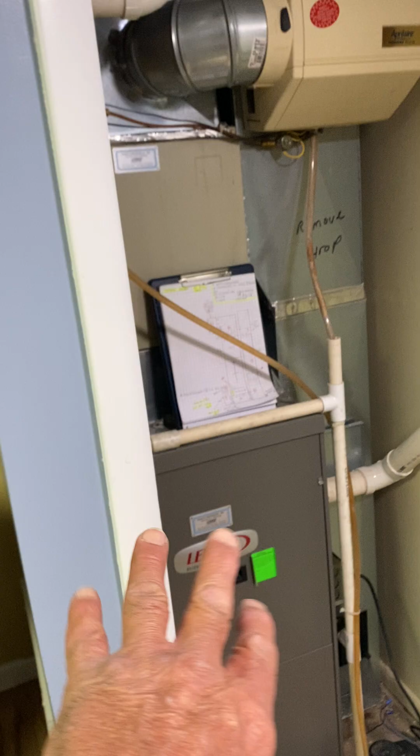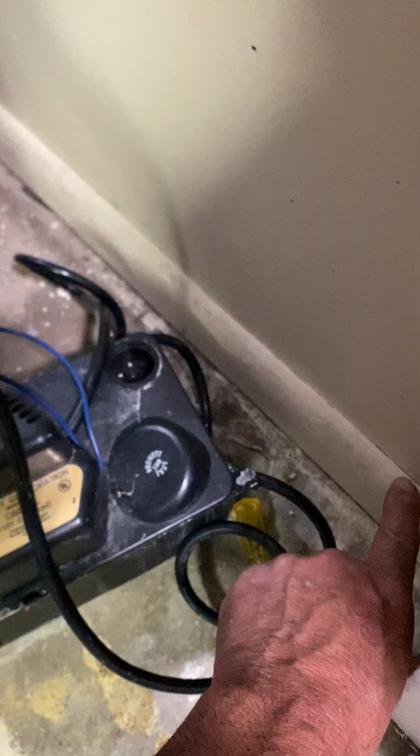So the new furnace will sit 2 inches from this 2x4 wall. I did that just so you can access the filter. So this trim, you have to remove this trim as needed.

So right here we have a filter grill. We're going to remove the filter out of this grill. And here I just made a 6x24 to, sorry, that's supposed to be, yeah, 6x22 to 2x22, 90.

It's gonna just go into the base here and just open it up to that wall. Obviously you're gonna have to seal it from the inside and stuff, but...

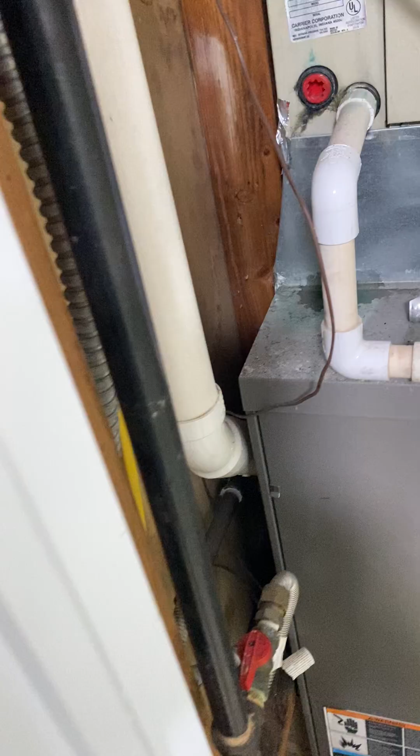We are moving the furnace back just a little bit, so the back of the furnace will sit 1 5/8 inch from the back wall. Right now it's 4 inches from the back wall, best I can tell. I did that just so this piece doesn't go backwards to that 90. Anyway, so I have a cut line right there.

So you're probably gonna have to, I'm making mine slip, so you're gonna have to bend those drives to slips and put your duct in. Then I come 2 inches past this wall with our next duct.

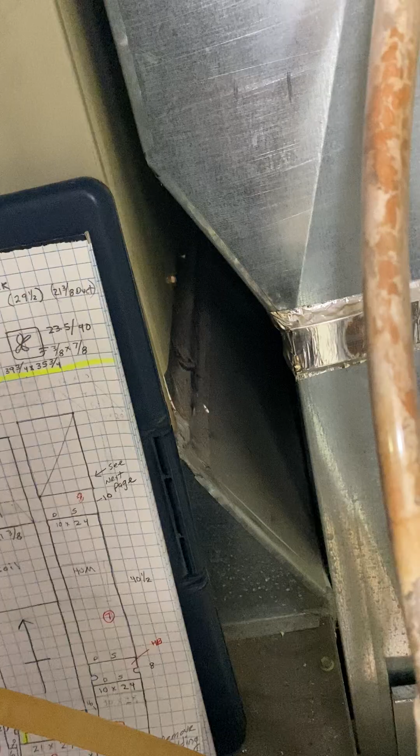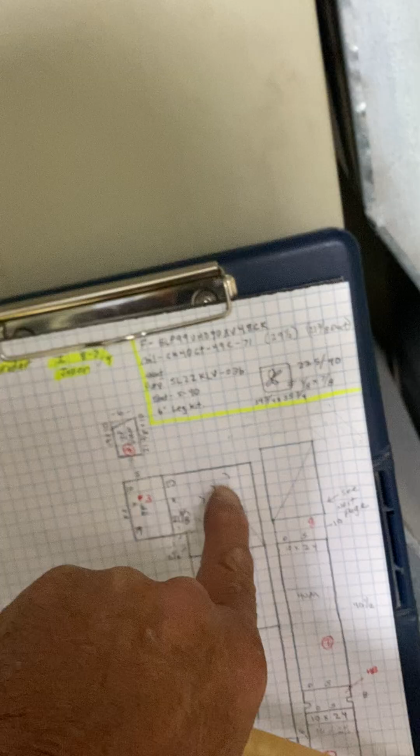But anyway, so your furnace will sit on a 90, 8-inch base, 90 filter box, and duct just as it shows. So I have a new 90 on it, and to do that, this can only be 10 inches wide.

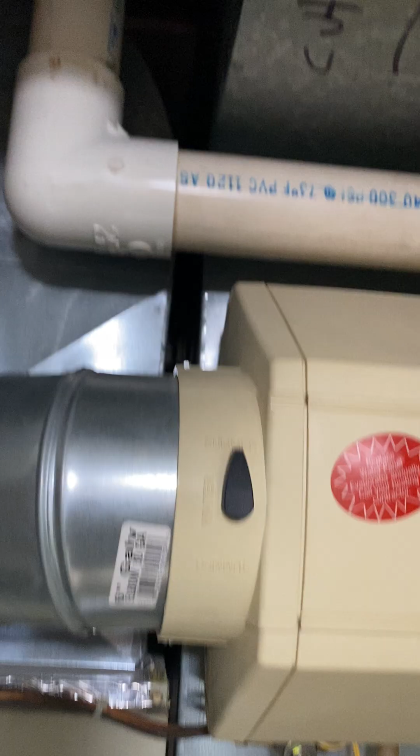I have a cut line, and you turn right here and just remove the whole drop and this piece of duct, which I believe goes back to the wall and has an end cap on it. Then we'll just connect onto right here. I'll show you that on a different drawing.

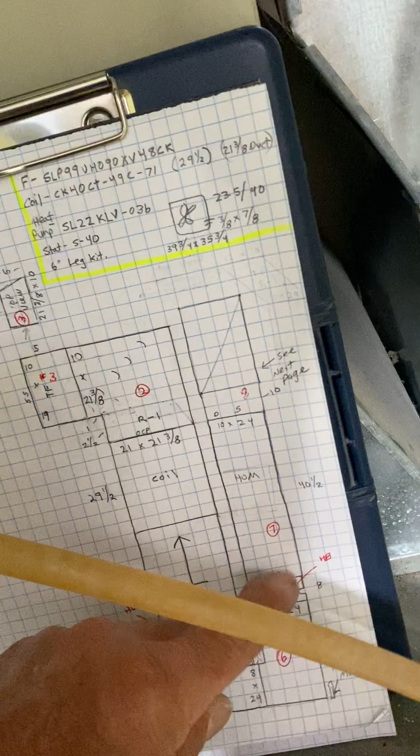Okay, so that's the top view of this piece. And piece number 6, a canvas, and you'll have to get all this on first because you can't put drives on this way because the wall's there, because it's going to be tight to the wall.

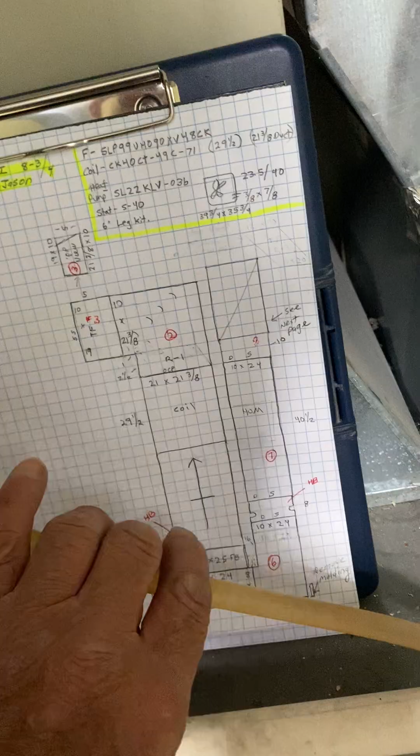So get this on down to there-ish. Well, all the way, I guess. It's going to be tricky. You may have to put this on and slide the whole thing in to your canvas.

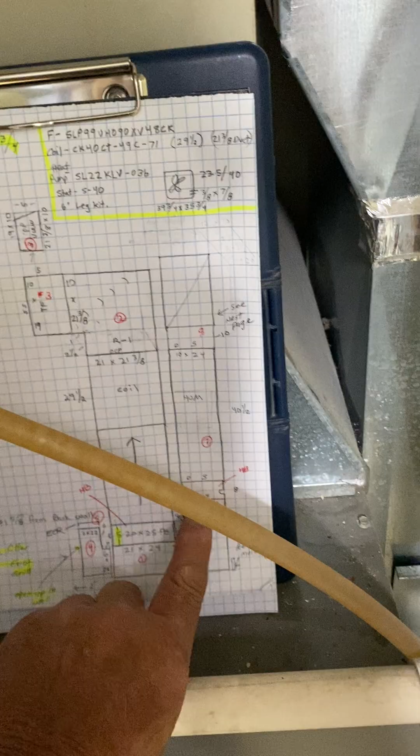Anyway, yeah, it's going to be tricky getting it in, but it should go. Sorry, brain thought.

Okay, so just as it shows, so this goes to a 90, and then I have a different paper. So this is a side view of the return air.

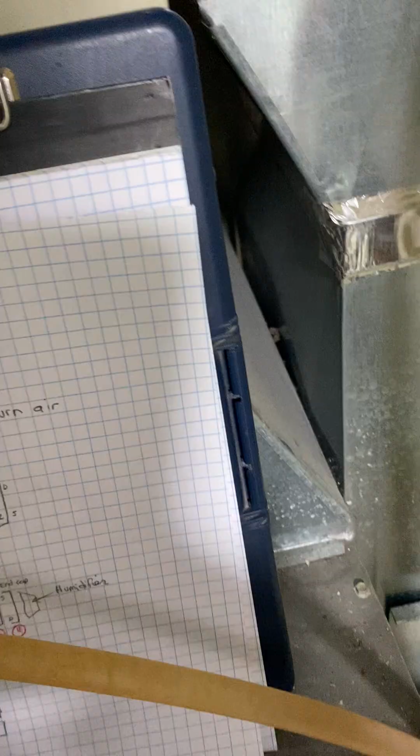So this right here is going to connect to this, and it's going to go tight to this back wall. And then we're going to have a 90. So I looked up inside the return, and the top of this duct is opened up to a return where that sheetrock is right there.

So that's all return. So I'm giving you a little piece of panning in case you need to add it right there, and then just open up the top of the 90 to that return there.

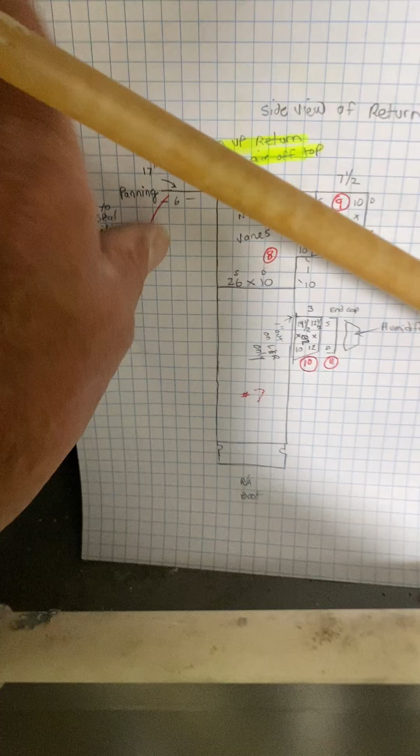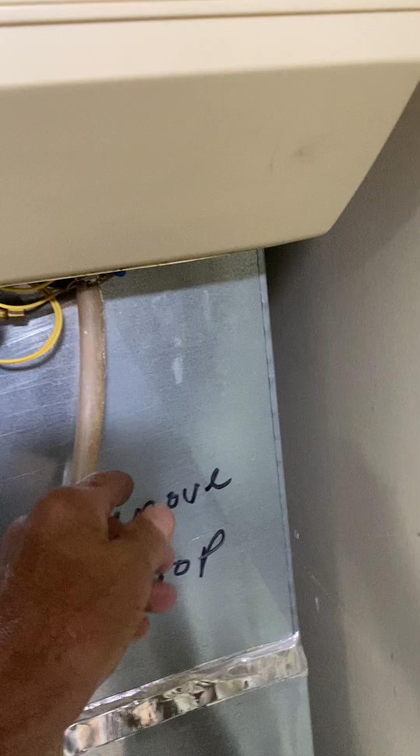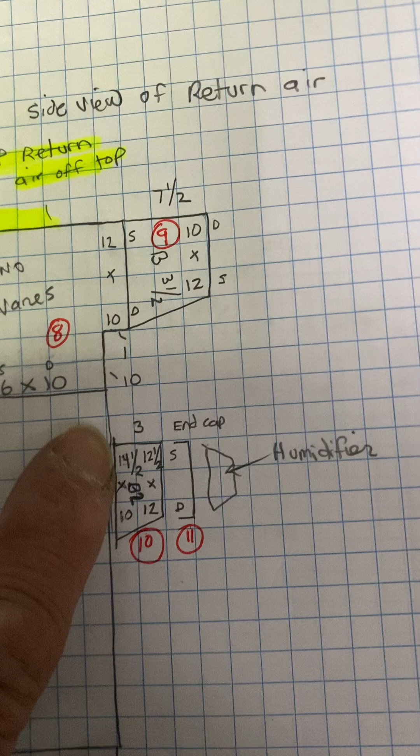Okay, oh, and then the humidifier, our new duct's only going to be 10 inches right from the wall. So I made a 10 by 14.5 by 10 to 12.5 by 12 transition, so you can reinstall the humidifier.

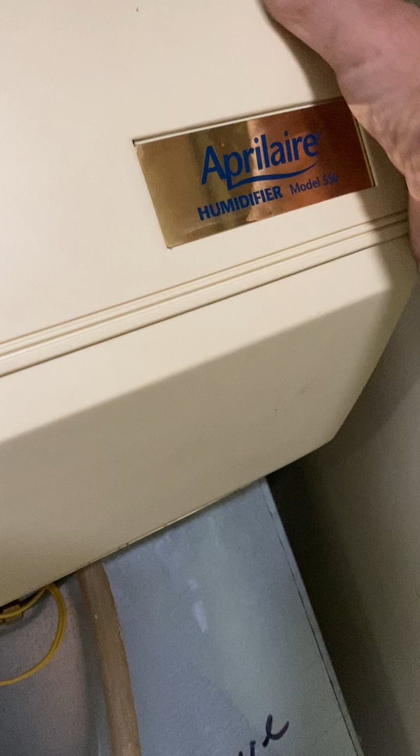I made the back come out 2 inches from the wall, so you can still get a hand in here to take off the door. It's not going to be quite as well, I guess this pipe's not going to be there anymore. So anyway, with an end cap, so we mount the humidifier.

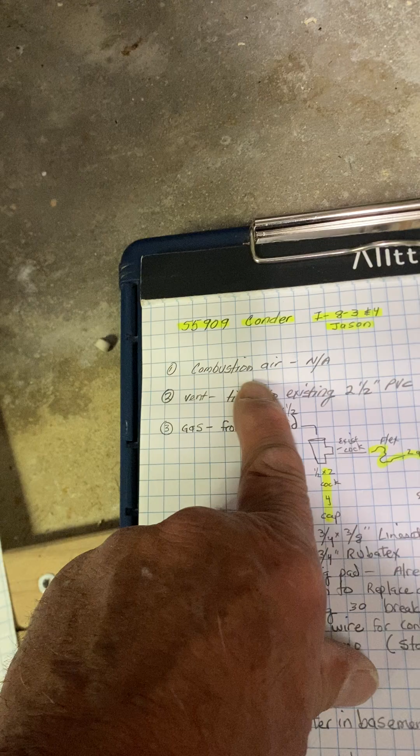Okay, combustion air not applicable. Vent, you're going to tie into the existing 2.5 inch PVC. So I gave you a 2.5 inch 45 and then two 2.5 inch couplings with two 2.5 by 2 bushings.

I know in the past I couldn't get 2 by 2.5 inch bells or something. Anywho, that's what I did. So then just 2 inch PVC to the furnace.

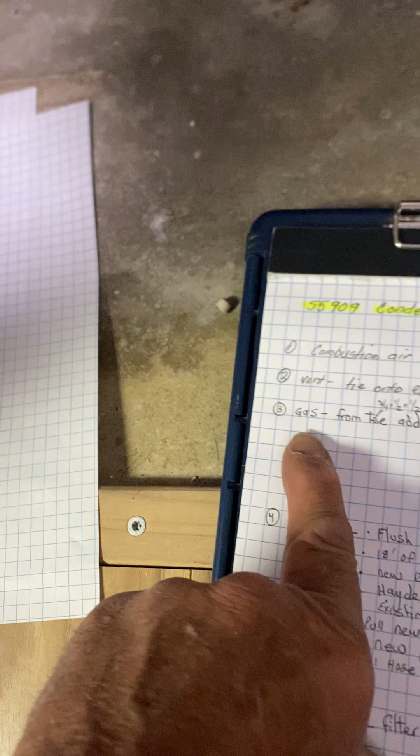So your gas, so from the T right here, you're just going to add a 2 inch, a cock with a 4 inch and a cap. Then from this existing cock, you're going to add a new flex and give you a 2 inch, a 90, and a 12 inch into the furnace.

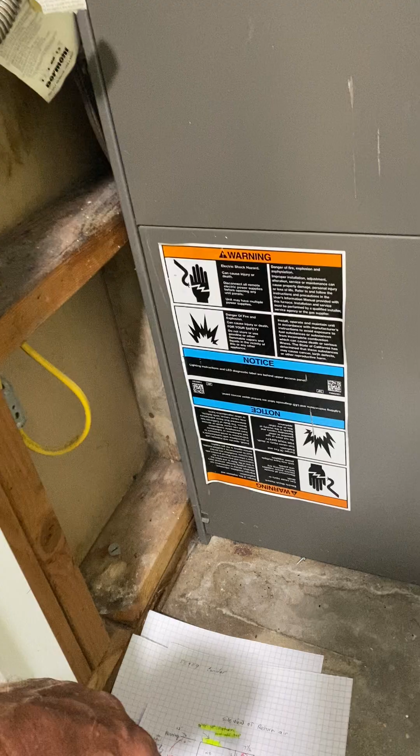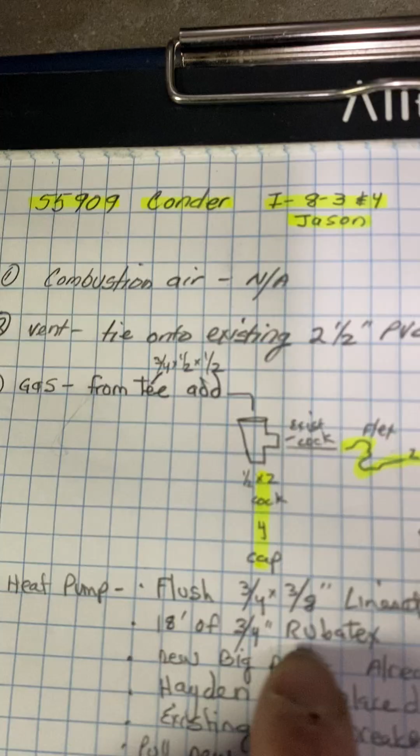Okay, on the heat pump, you're going to flush the 3/4, 3/8 line set. I'm giving you 18 feet of Rubatex, because outside we're moving the AC a little bit. I don't know if 12 is going to be quite enough.

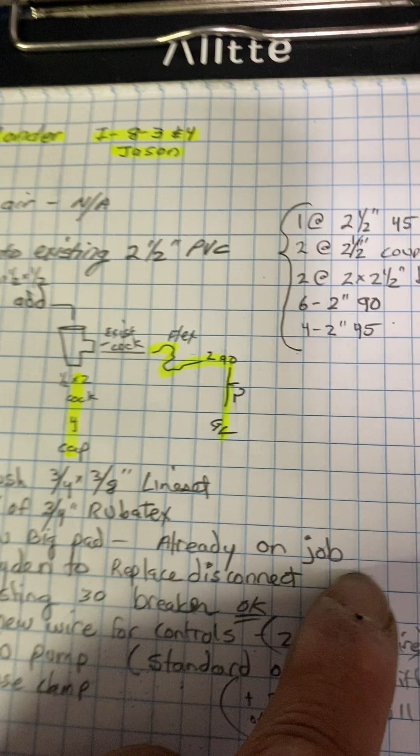New big pad, so the pad is already on the job. I brought it with me today, so I'll put that on a separate rec sheet and just know that it's here.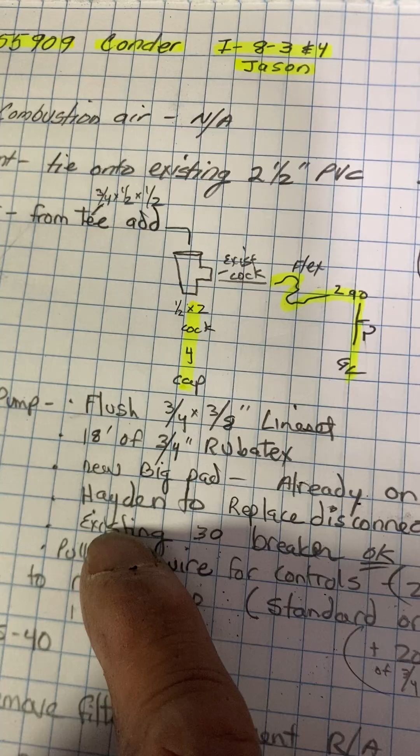So Hayden, our electrician, is going to replace the disconnect. The new air conditioner will be on the left side of the disconnect, to be 3 feet from the panel. That's why I brought the pad here, so we can reroute for sprinklers and stuff.

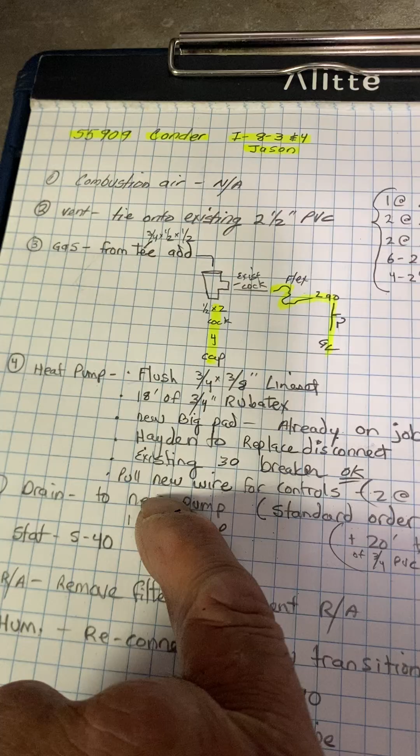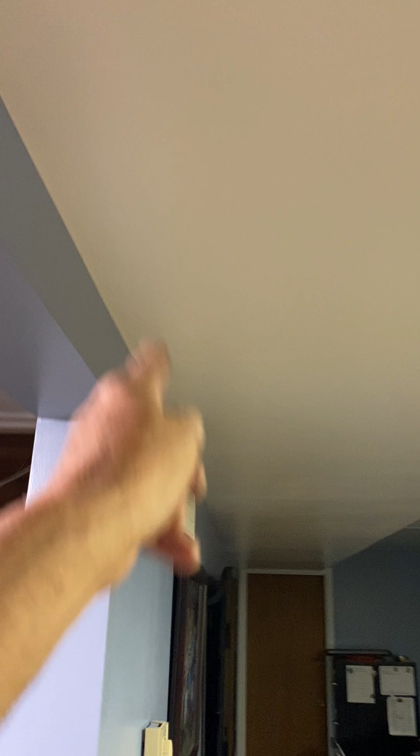So you're going to need to pull a new wire for the controls. So the homeowner wants to -- first of all, you can see the main gas line, well, you might not be able to, is right there. That's where it comes in, and comes in this fur down all the way. So he said he's going off memory, but he said he thinks it's all open.

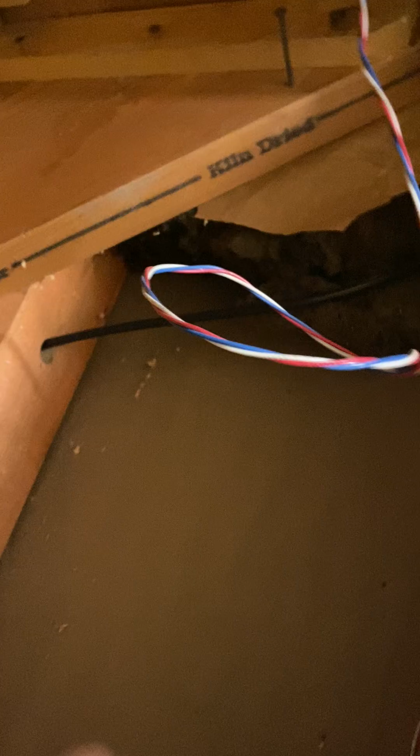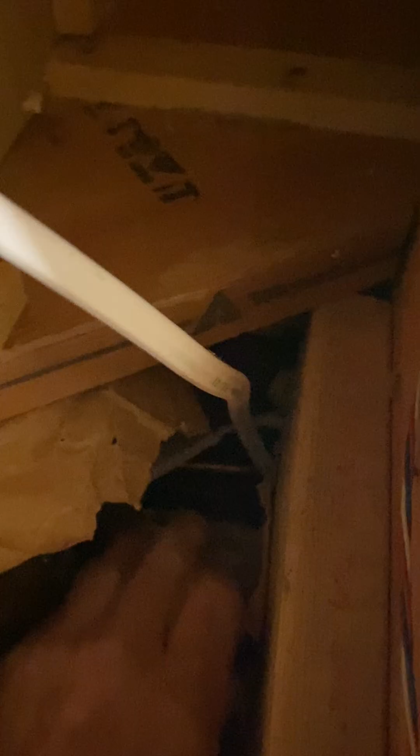So also under the stairs here, there's this hole where you can reach up inside. I don't know if that's a thermostat wire or what. Oh, that's the doorbell. Anyway, he said you can reach up inside that fur down area.

So what he wants to do first is try to tie onto the existing 2-wire and pull it through. And you know, I said, well, we can try that. It may break by the time we get it here, but that's what we'll try first. If that doesn't work, well, I'll go out there and show you at the AC in a minute.

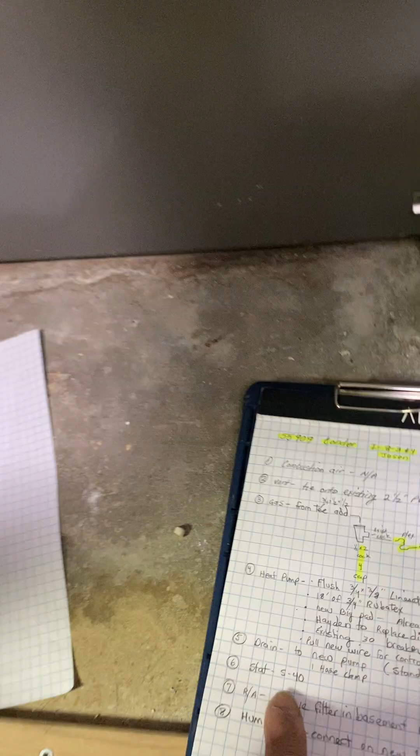Thermostat, S40 thermostat. See, I haven't looked at the wires, so we do have 4 wires. Well, I guess, yeah, it's a given.

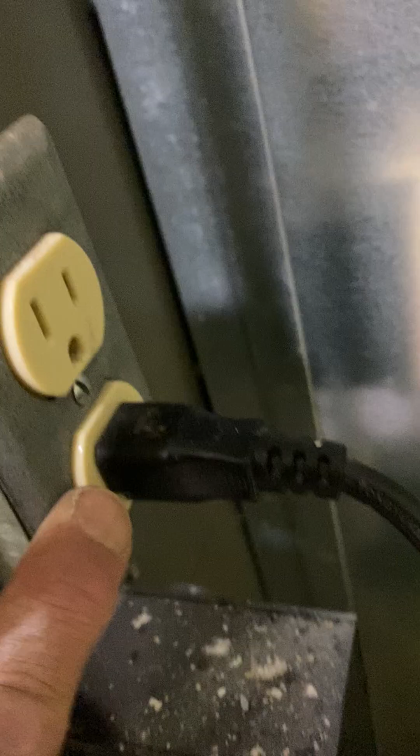Oh, I skipped the drain. So drain, we're gonna put on a new pump. I figured just reuse this electrical box here and wire that in. And I'll give you a hose clamp there.

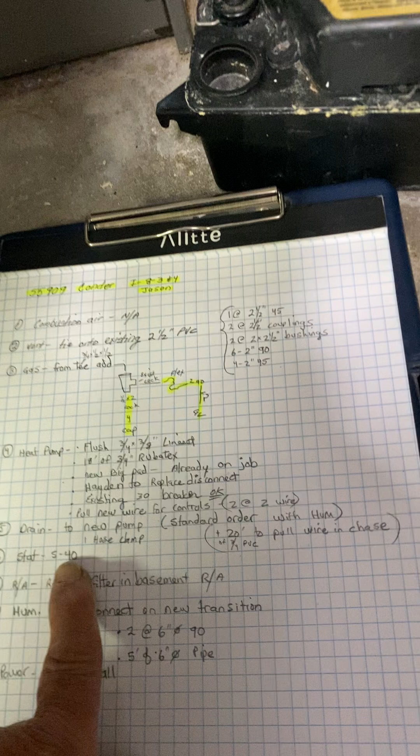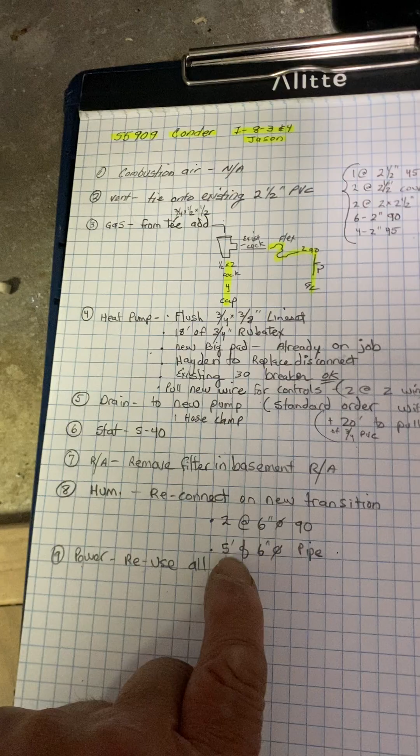S40. Return air, remove the filter in the basement, return air. Humidifier, reconnect. I'll give you 2 90s and 5 feet of pipe. Power, reuse all. So we're just going to reuse this existing service switch and this thing here.

All right. Just make sure when you cut your PVC here that you leave yourself a little bit so you can put it on the end of the 45, you know.

Pausing, and we'll go upstairs. Oh, on the AC, the breaker panel is behind this door here, right here. Existing 30 amp breaker for the AC is okay right there. Kind of hard to read. And they've actually marked it air conditioner and crossed out that.

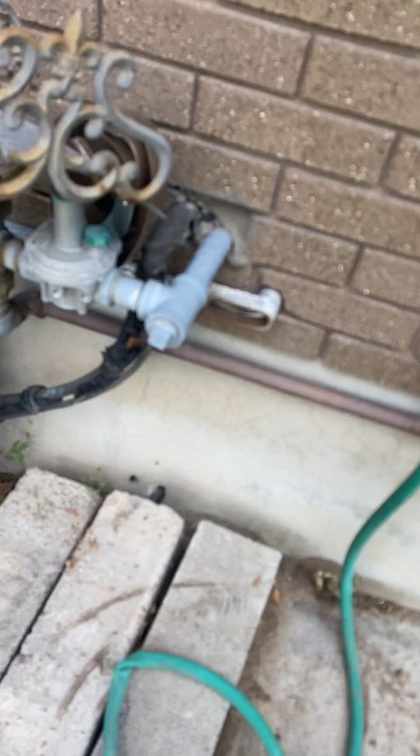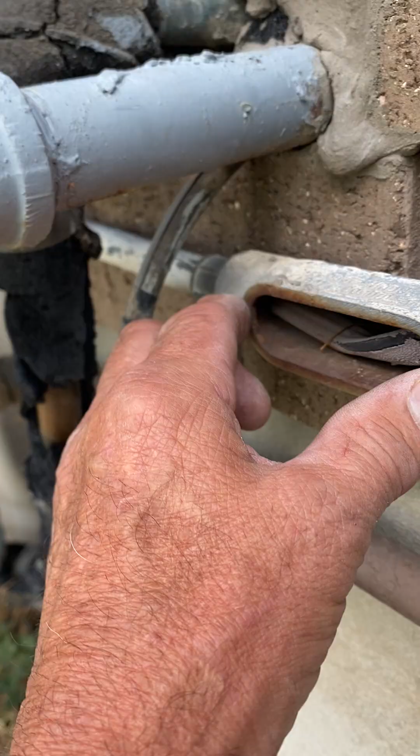So let's go outside. Okay, so outside, Lance wants to put on a cover for this here, and he might have to replace it because I don't see any screw holes, but I'll order one. Just clip back in and there's a fitting that goes on the back. I think the ones we carry have little screw holes in it. It's not a big deal.

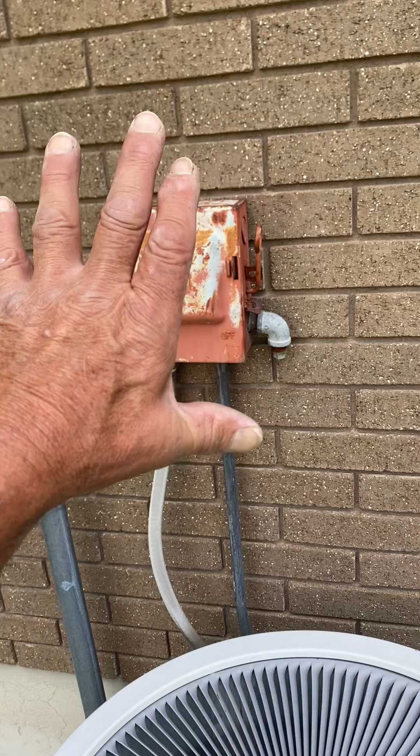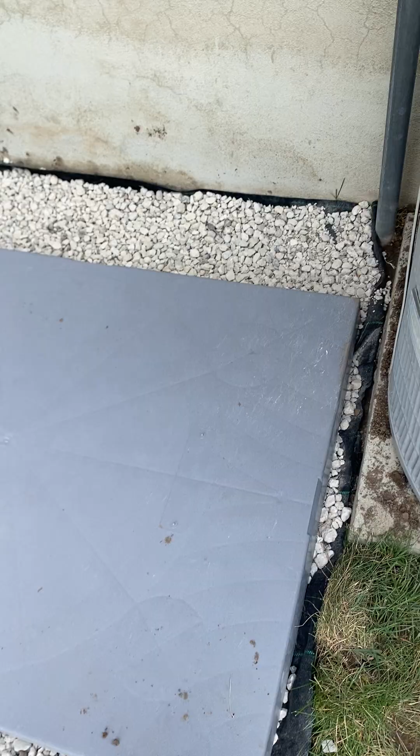Oh, such a slow run. I'll give him one. Anyway, electrician's going to replace this disconnect with the new one. Vern's already got the pad in and leveled. So check the level. I don't know if it is level, but it's close.

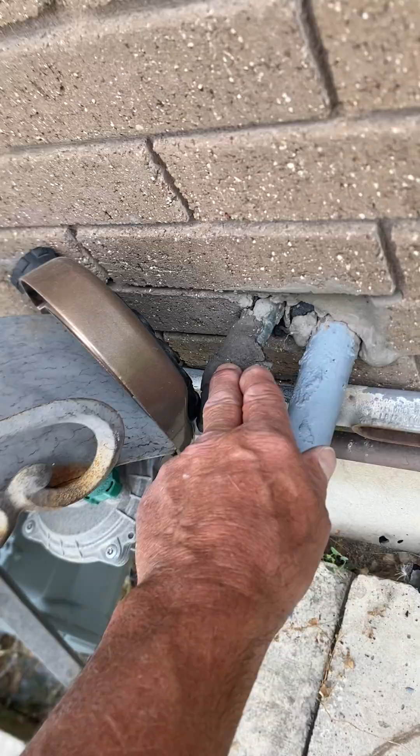So line set, you're just going to cut it as close as you can and run new Rubatex and line set over here. So make sure you have, you know, like 10 feet of 3/4 inch copper line set. That's it. Oh, on the power, so here's the gas line.

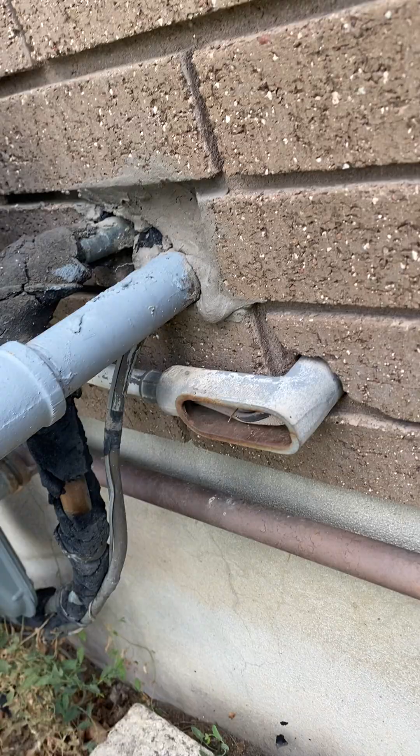So you might be able to drill a hole here, and I've given you 20 extra feet of PVC, so you can try to fish that cable through. Push the PVC through and try to feed your line set through that. And if those two don't work, then...

Just have to cut a hole in the sheetrock to pull a new wire. That's it. Let him know before if you have to do that. Thanks.